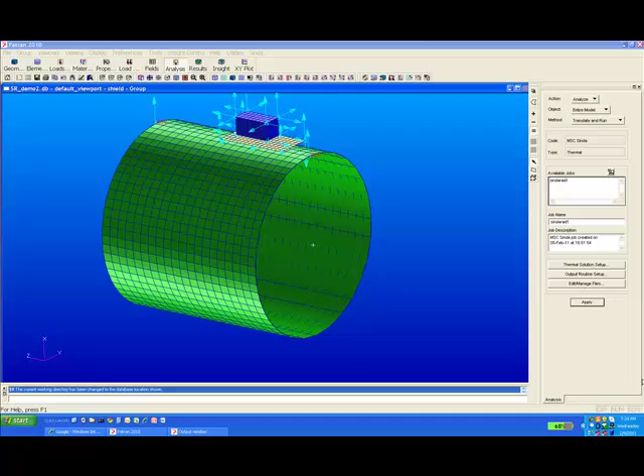For this model, we're going to take the same model we ran before with the electronic box over a hot nacelle or engine, and we're going to add this radiation shield here to protect it. We're not really thinking much about the views here.

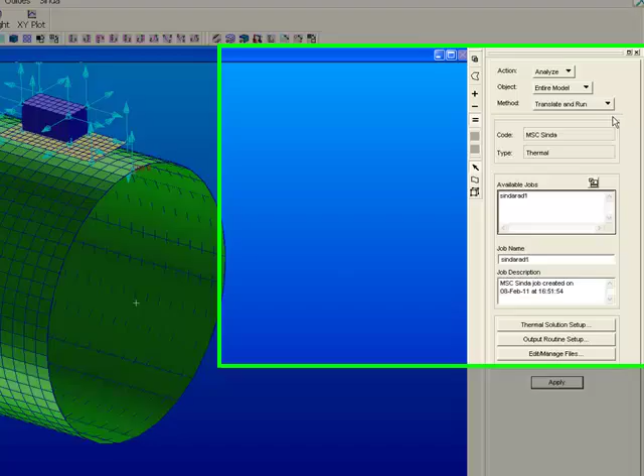We just figured, let's put this shield under here and see how it works. So I'm going to go under my analysis, make sure I still have SindaRAD selected, using the flux method, and I'll pick the interactive method so it will pause in SindaRAD and we can look at the view factor results.

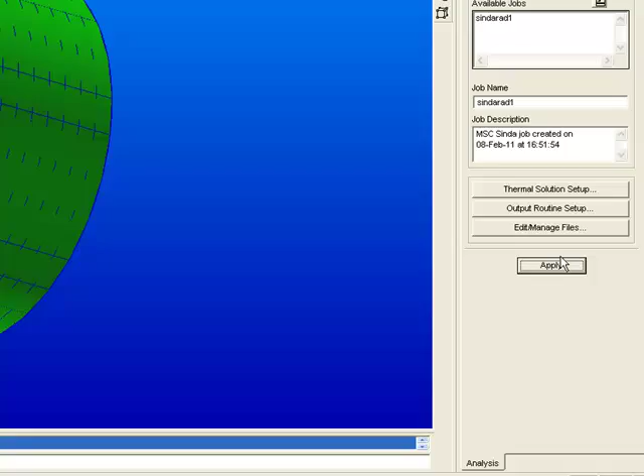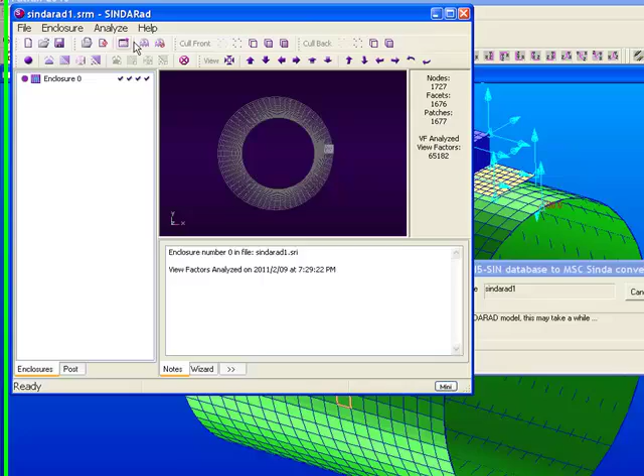So now I run this, and it will build the SindaRAD model and launch this, and then I can compute the view factors, which compute in a few seconds. And I can smooth the view factors. It happens very quickly. Now you see I have 68,000 view factors. Before I think I had about 30,000.

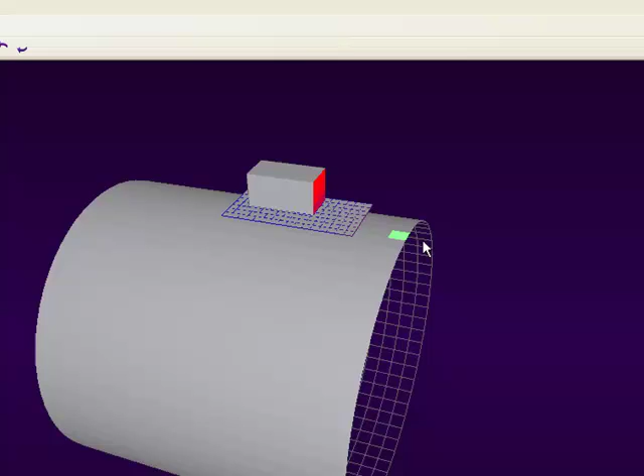But let's look at this model here. What you can see is our plate here. Let's see how well this plate was doing to protect it from the hot engine. If I right click, double click, you can see this hot part of the engine has a pretty good view factor to this plate here, whereas this plate down here only sees the top. But this one right here has a pretty good view factor, so that's probably going to heat up. But the ones underneath here don't have any view factor anymore because they have a shield.

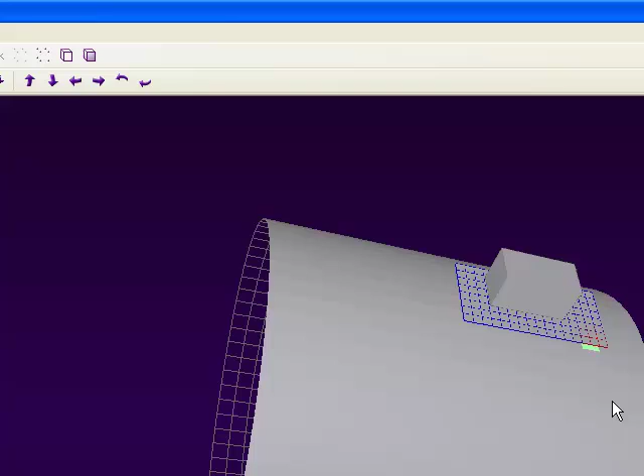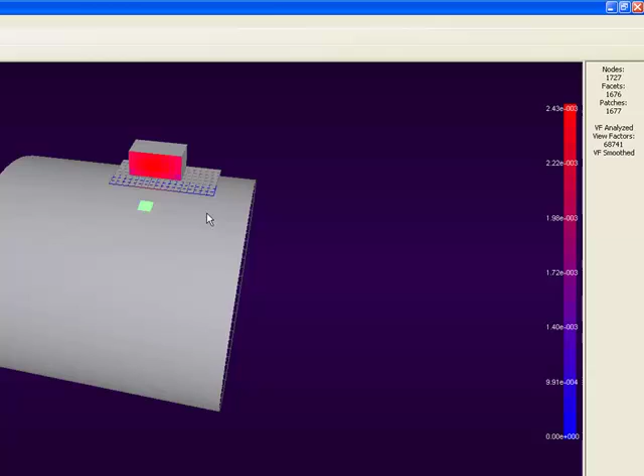These, on the other hand, which are colder on this end of the engine, have a good view factor to this end. So we can see the shield really didn't do a very good job for the ends of the box, nor for the sides of the box. It still has some view factor from the sides and from the ends.

So let's close this now and save our results. It will save those results into our Sinda model and it will solve for temperatures. If you remember, we're about 81 degrees before on the hot spot on the bottom of the box. So it's done running now. Actually not done yet. It's running. Okay, just finished.

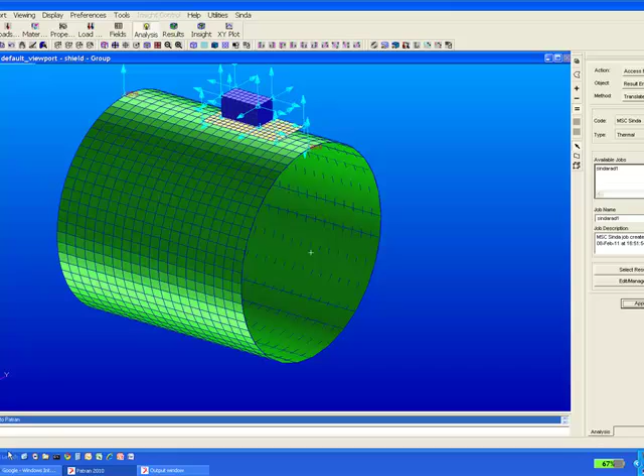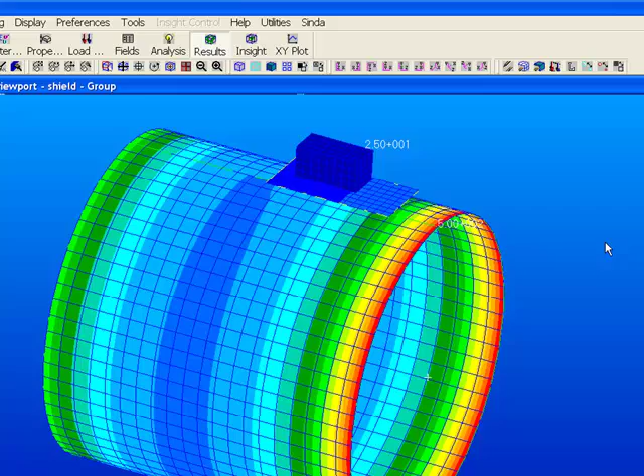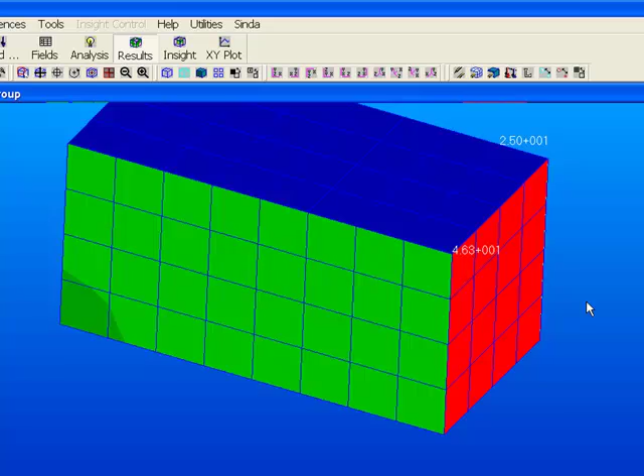So now that it's done, we'll import. It says results imported. Let's go to wireframe here and post-process. Now it's hard to see what's happening with the box. I can see there's some gradient in that plate, but let's just look at the box by itself. We have another shield in here, another group, and I'll just fit the box, and you can see the temperature now is 46.3 degrees instead of 81 degrees. So the temperature changed quite a bit.

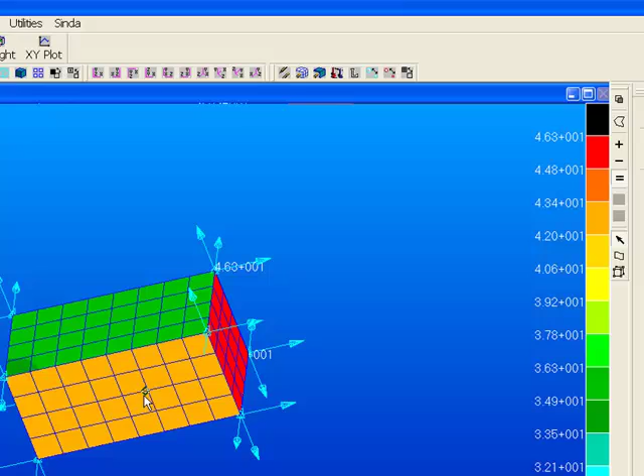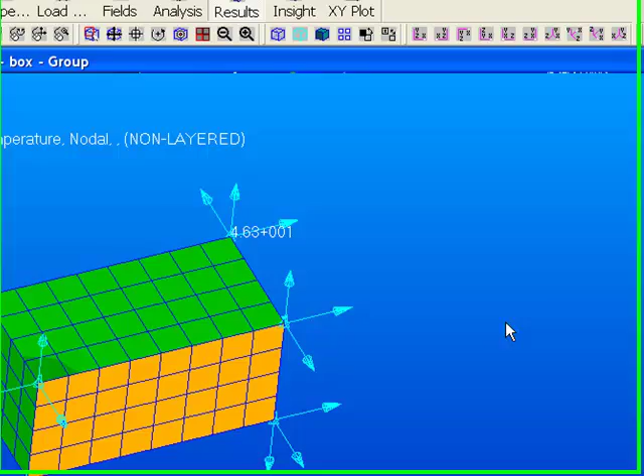Let's look at the bottom of the box. You can see the bottom of the box now is cooler. It was the hottest one, but this end here at 46.3 degrees is really this end, because it saw the hot end of the engine, where this end is down at 35, 33, 34, maybe 35 degrees, because it saw the colder end of the engine. So that radiation shield didn't work very well. It protected the bottom very well, but not the sides.

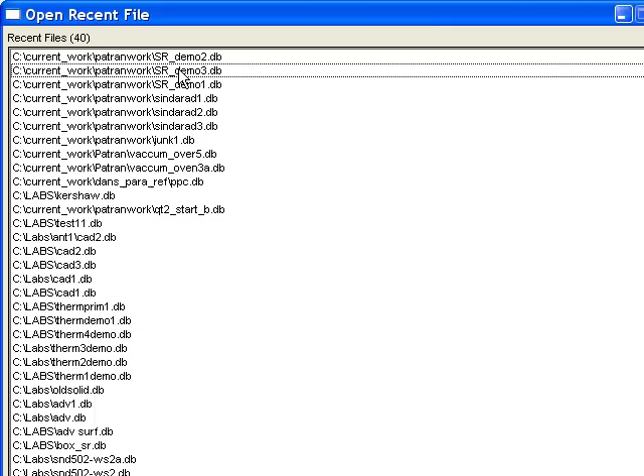So let's see what you might do to a radiation shield. Let me just open a third generation of this model. And this time on the shield, I've added a little bit of a wall on this end. Let's just see, adding that one wall on one end, how that might protect the end of this box. It's not going to protect the sides.

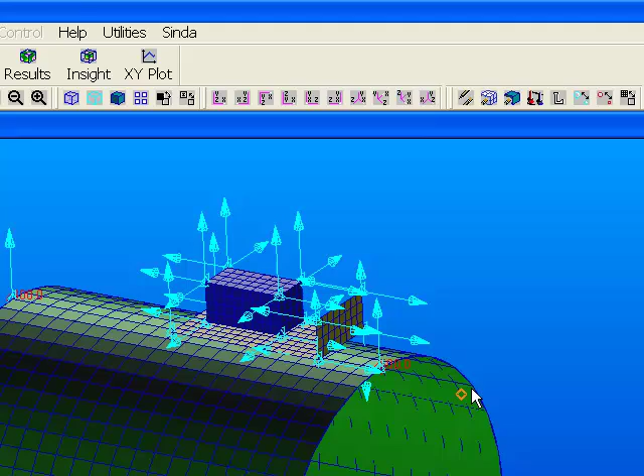We'd really have to build a little fence like this all the way around to protect all the sides, or make this radiation shield much bigger. But let's go and run this now.

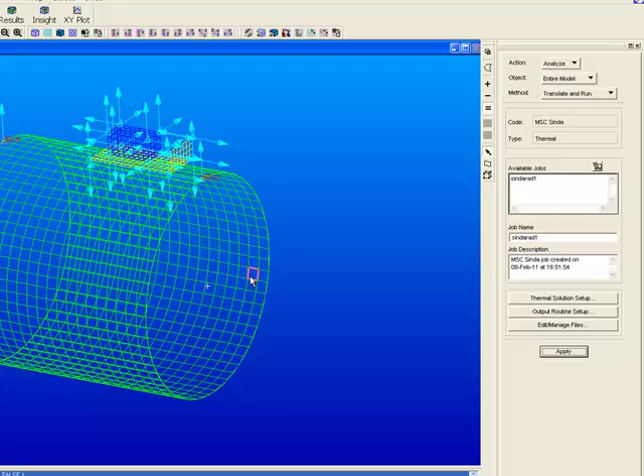We're going to go into Analyze, make sure we have our SindaRAD selected, and I will run it interactively again. So now we hit apply. It first builds our SindaRAD model. And I'm going to tell it to compute the view factors, which it's doing.

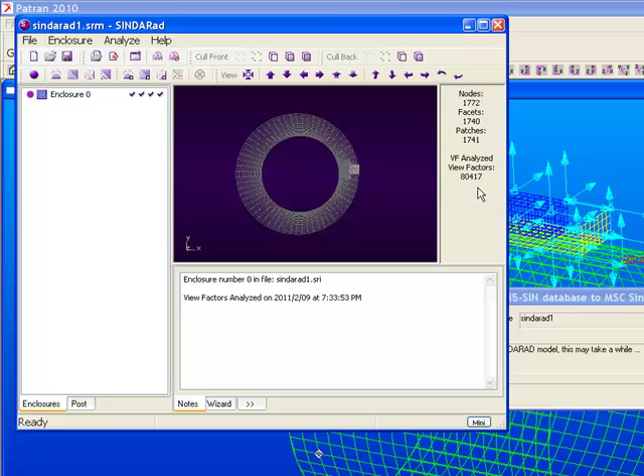Before, I think we had around 65,000 view factors. We should have a few more because we have more geometry in here. And there's 80,000 view factors, it says. Let's hit the smoothing and make this full screen. So I have 80,000 view factors in here now, and you can see that little shelf.

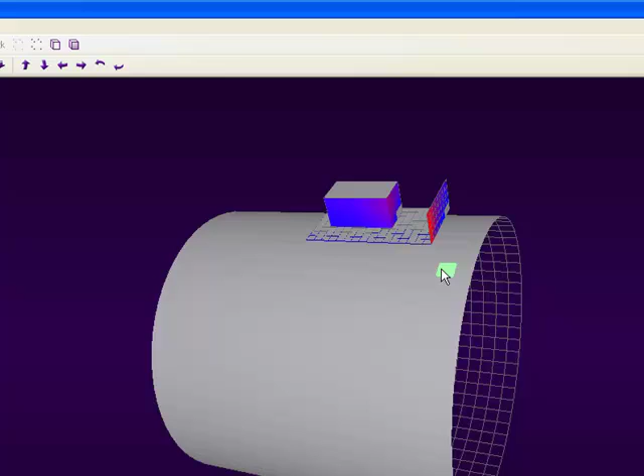Now let's look at this hot end here. I double right click, and you can see it sees the shield, but it doesn't see the box. If you get out here, you can start seeing the box a little bit, some of these elements. And of course the sides, or this end here, still have a good view.

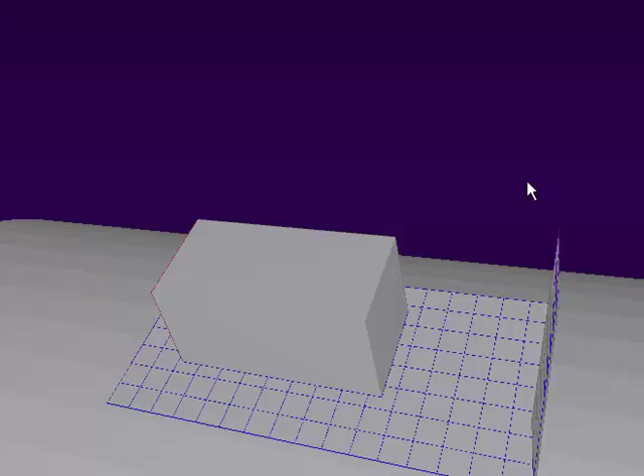If you look at one end of this box here, zoom in, you can see it has a good view factor of the shield here, and then it has some view factor of the nacelle also. So let's close this and save our results.

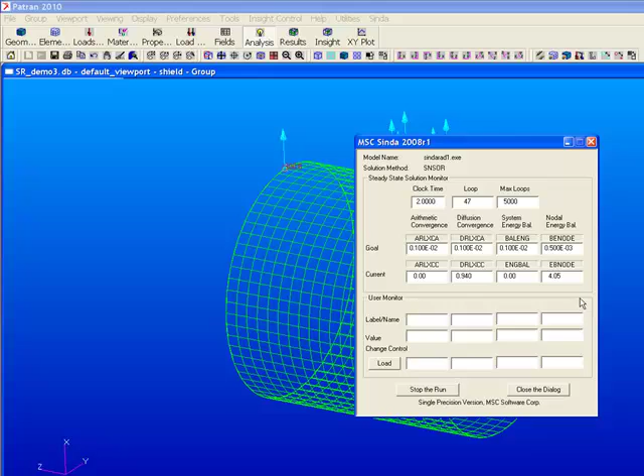And let's look at our temperatures. It's pre-processing. Now Sinda's running. It's done running. We're going to access our results.

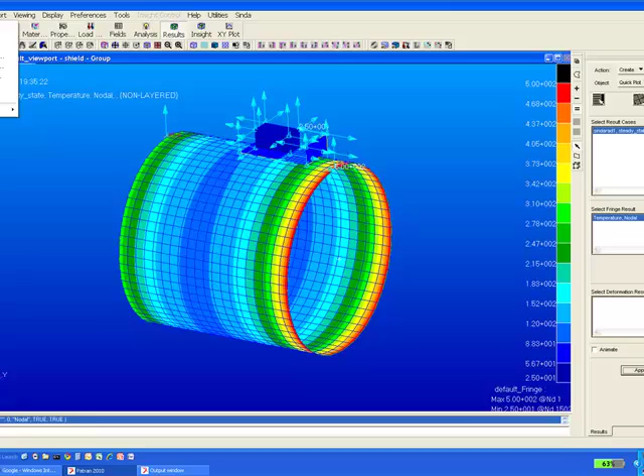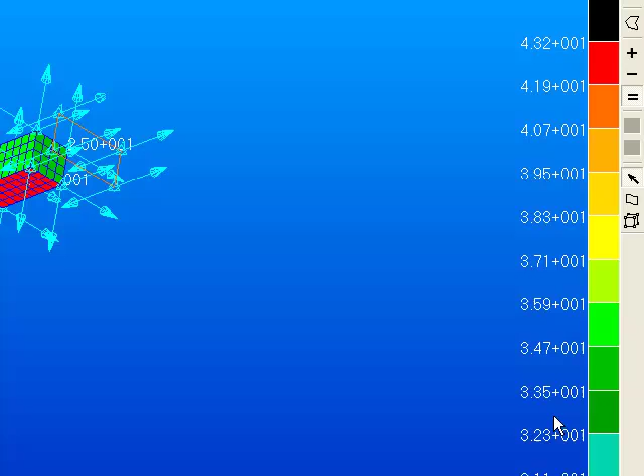Now you can see we have our shield with the vertical piece here. Let's look at the group with only the box. You can see the bottom now is 43 degrees. And this end that was hot before, that was the hottest side, is now much cooler. It's down to 33 degrees. So we've shielded this end pretty effectively. And the top, of course, is cool.

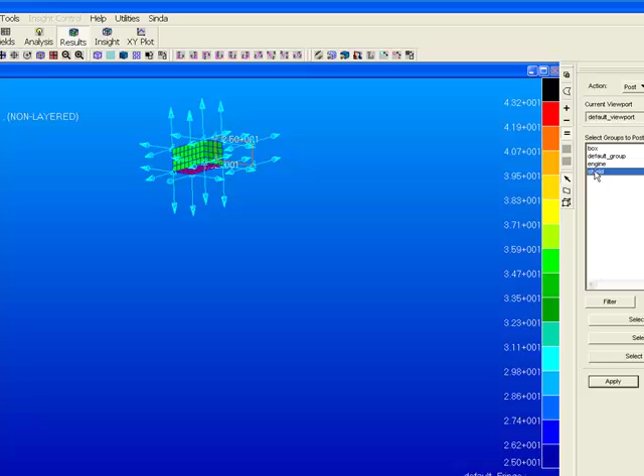So that end shield where this was the hotter one with just the flat shield, that little end piece on the shield here, which I can also draw here, shielded this end to keep it cooler from the hot end of the engine.

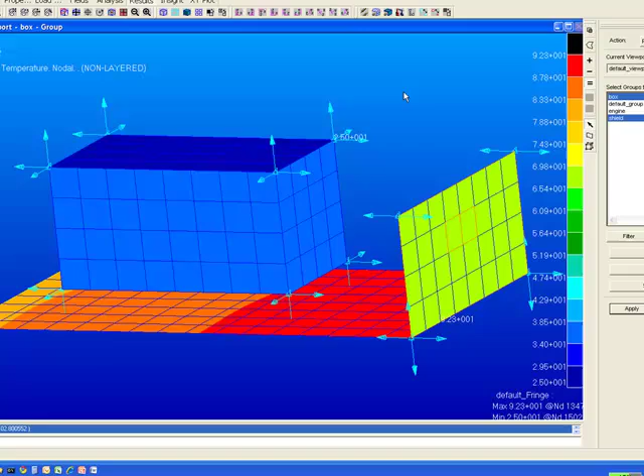So these are the sort of things you can do, and a lot of this design work you can just play in SindaRAD and look at the view factors to make sure your shielding is sufficient before you carry it all the way through to the temperatures. In this case it ran pretty fast, so it didn't make any difference. So that's the end of this demonstration on SindaRAD.